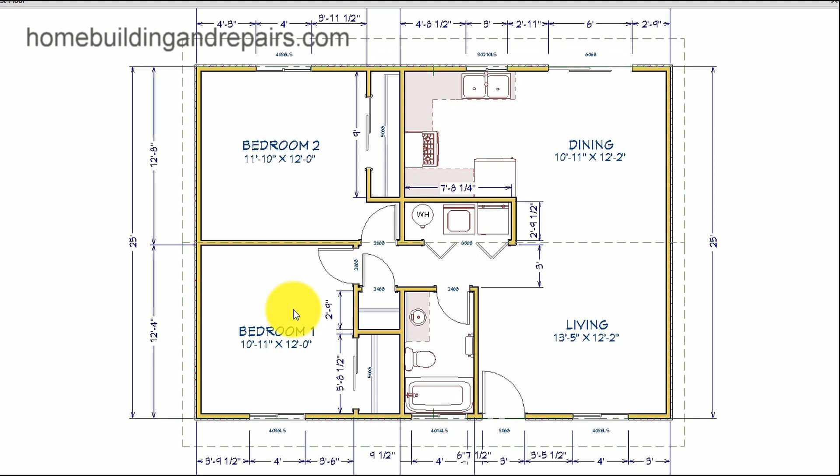Let's go ahead and get started with our building foundation. Put a couple of walls in, and that's it, we're done, there's the whole house. Okay, that's the house. Let's go ahead and zoom in for a closer look.

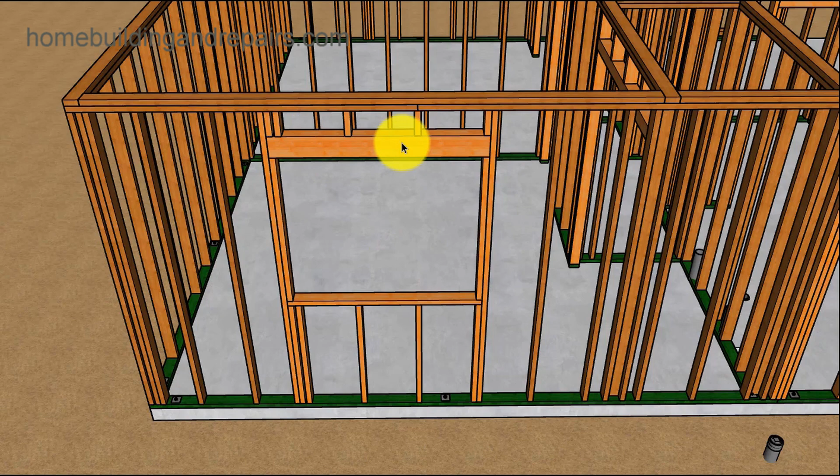This is bedroom number 1, the window framing. Again, there'll be more information on this in the other videos. Bathroom, top plates connecting the walls to each other. Front door and the window header for the living room window.

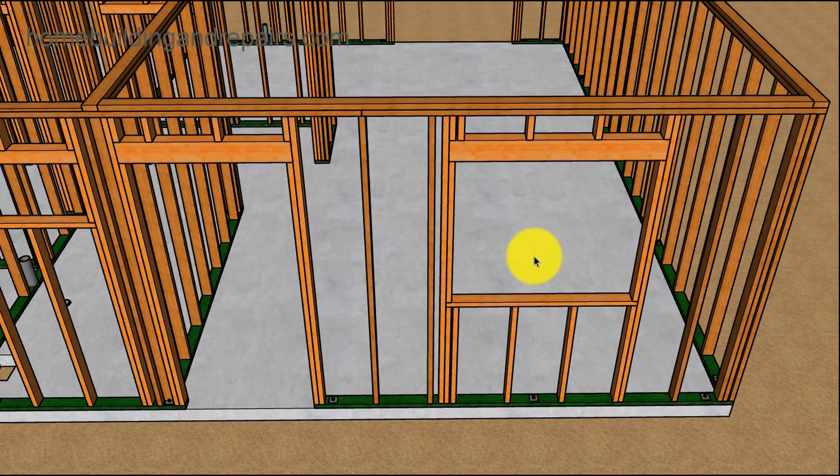Our framing breaks, remember, 4 feet minimum. Most of the time, you would need to check with your local building department to verify that. Anchor bolts, spaced about 6 foot on center, another break.

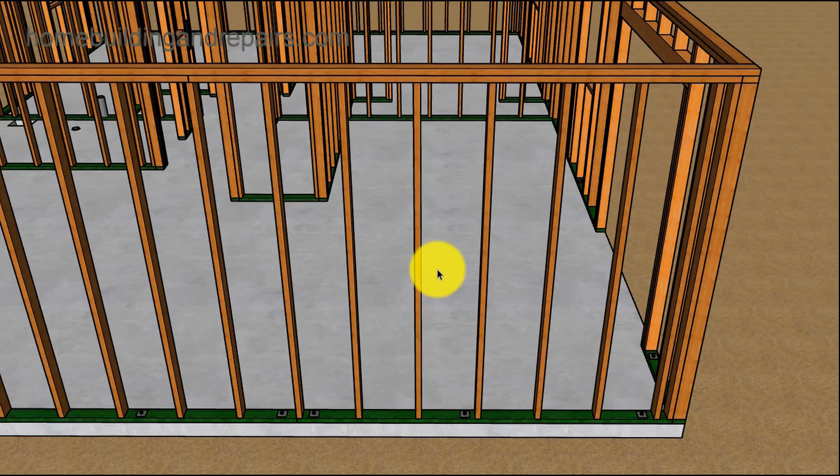Now we're in the dining room area. That's just a 16-inch on center wall framing. Everything is 16 inches on center throughout the house. This is the sliding glass door that is going from the dining room.

Here's the kitchen, going from the dining room outside. Kitchen window, the drain for the kitchen sink. The breaks again, 4 foot minimum. They can be longer, just don't want them to be smaller.

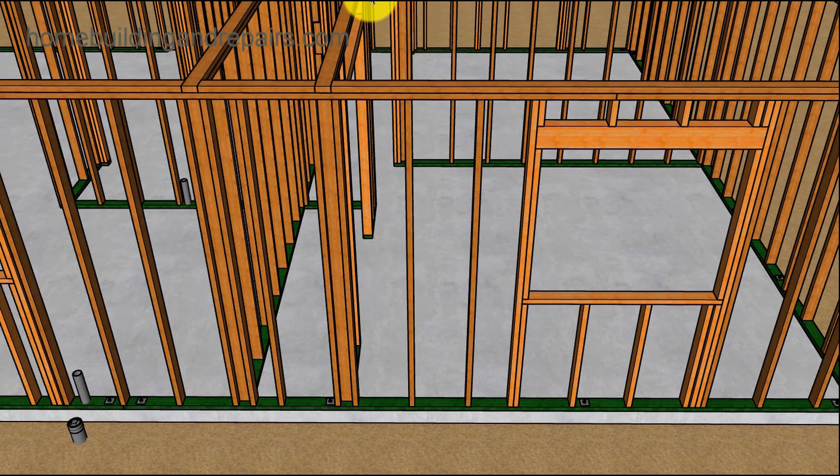Bedroom number 2, window framing. The other wall, and again, 16-inch on center spacing for this one.

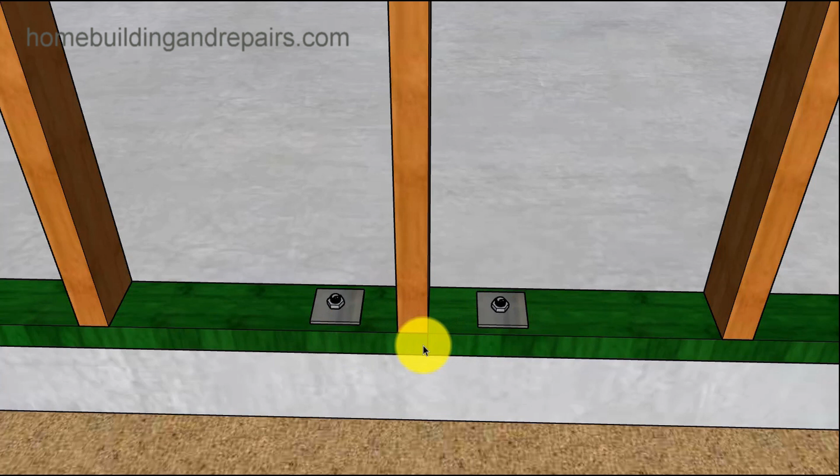Framing base plates, these are the breaks. You need to have an anchor bolt on each side of them, no more than 12 inches from the break. 12 inches maximum. You can have that closer, just can't have it farther away.

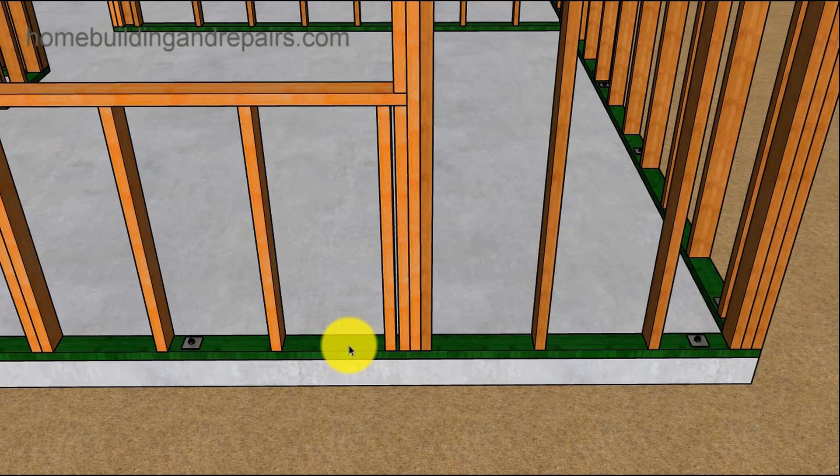Look at the sill framing here. You could always move this stud over a little bit. Sometimes it makes it easier to insulate, keeping all of your wall framing studs 16 inches on center so the insulation will work out.

The plate break again, and the drain, and then the clean out here. Again, anchor bolt spacing. Kitchen right here, closet to the bedroom, and then the washer and dryer area. Possible forced air unit for the heating and air conditioning.

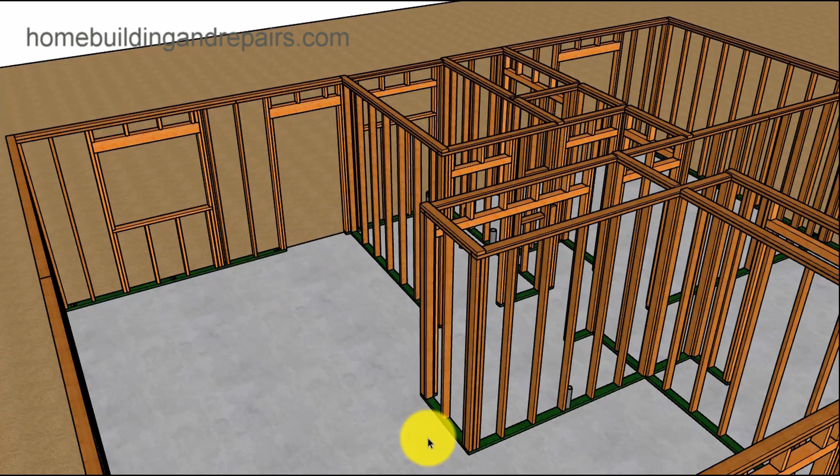Living room, front door. You come in the front door, go to the kitchen, go down the hallway. Bathroom, medicine cabinet, wall framing.

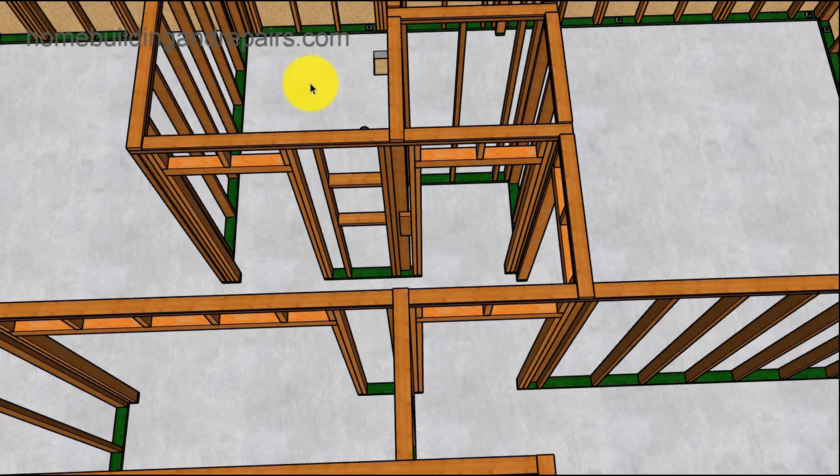I did change the wall framing on the other videos. If you click on the link, I believe you'll find it on the second link where I did one. The first link is for exterior wall framing, the second one is for interior wall framing. I did some changes in there just to... well, actually I did the changes because these walls disappeared in my software, so I figured I would make them a little different, using a 1x4 top plate.

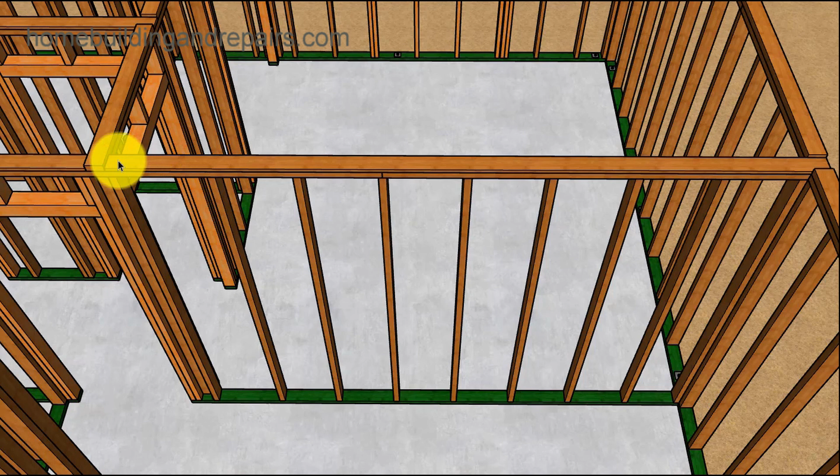This is for the trusses. You're wondering why all of the top plates are running parallel to the front of the house and perpendicular to the roof trusses. The roof trusses are going to run this way. You can use 1x4 on them. The wall framing plates need to have a little space for the trusses to move, and that's usually why we use 1x4s for the top plates in houses with trusses.

I have people argue with me all the time, saying 'oh no, you don't do that.' Okay, fine, do whatever the truss manufacturer says, that would be fine, I got that. If that's the case, change these to 2x4s or 4x8s, whatever they say.

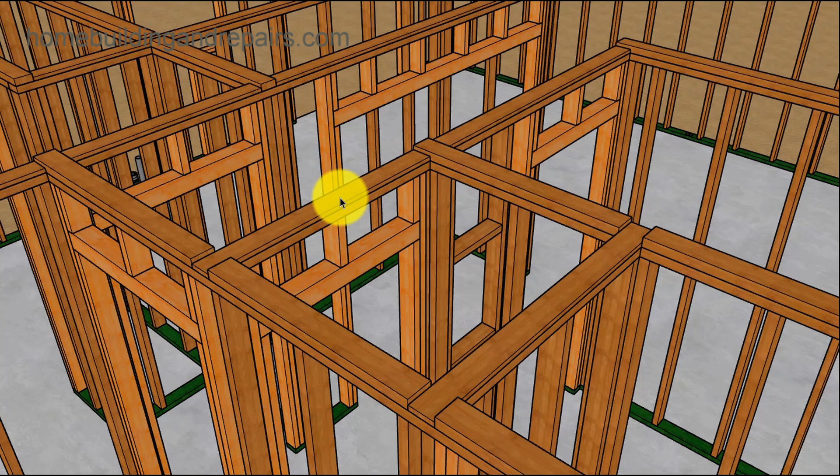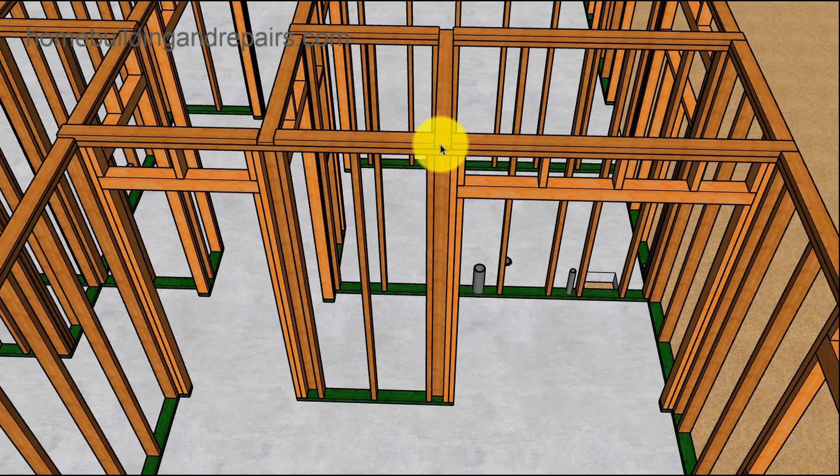So I do have a lot of people that argue with me. They come and leave one statement, and I comment on their statement trying to be as kind as I can, and then they leave and never come back. If you leave comments on my site that I feel are inappropriate or confusing, I try to erase them. I can do that right now because my channel's not real big, but next week it's going to be massive, probably not going to be able to ever get a hold of me again, 1 million views a day kind of a thing. But until then, I'm still reachable.